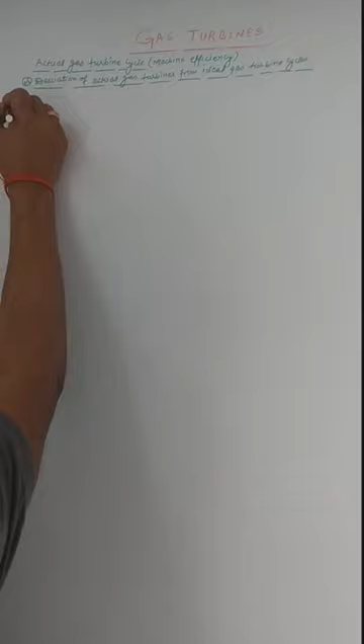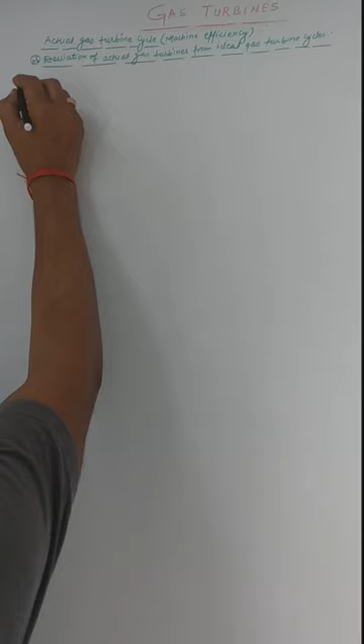Since we know that the factors which are responsible for the deviation of actual cycles from the ideal cycles are, since we know that the theoretical or ideal Brayton cycle is completely reversible in nature.

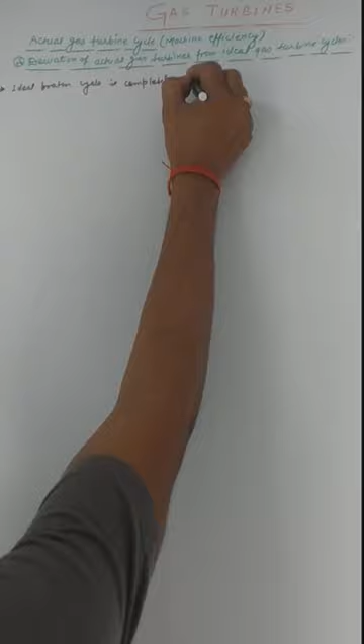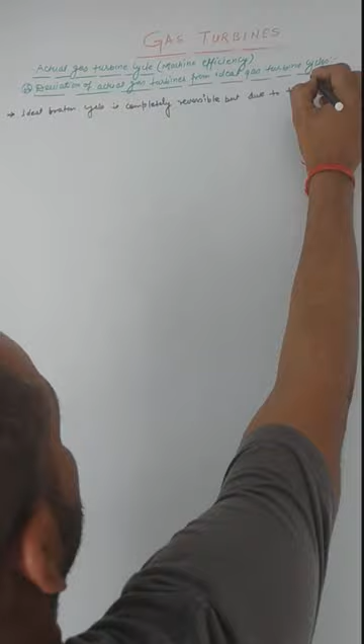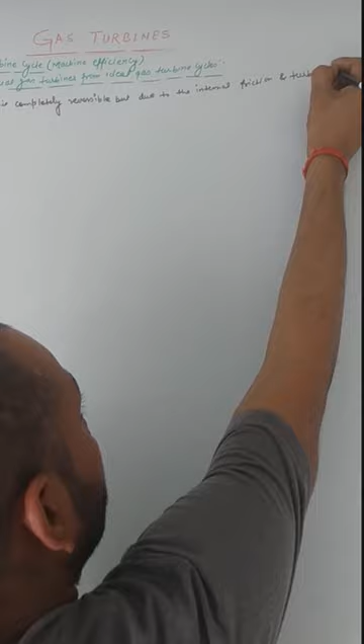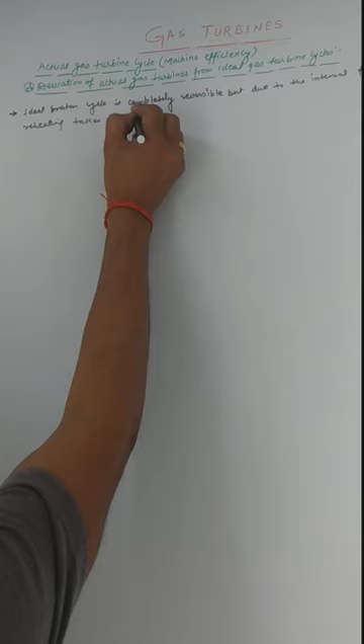But due to the internal friction and turbulence, there is a reheating that takes place in the compressor and turbine.

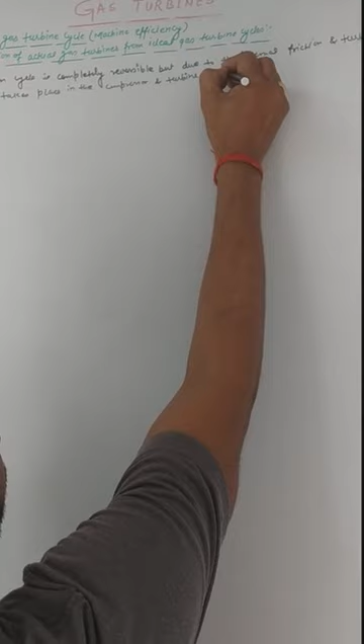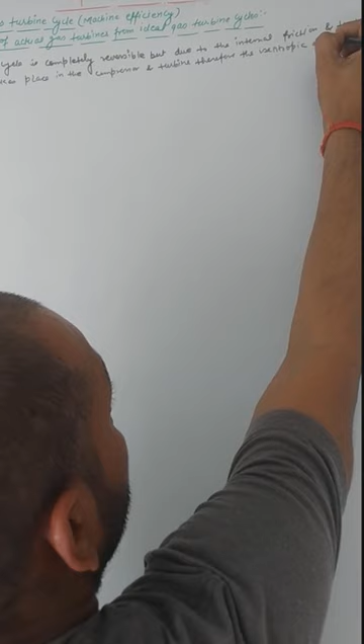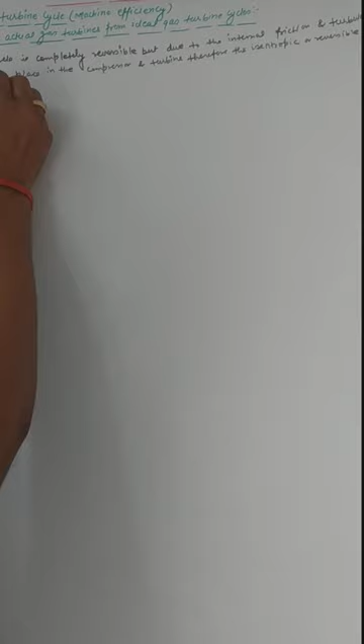Therefore, the isentropic or reversible adiabatic process will no longer be isentropic.

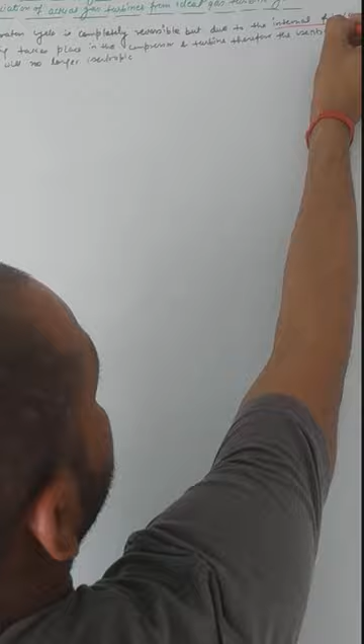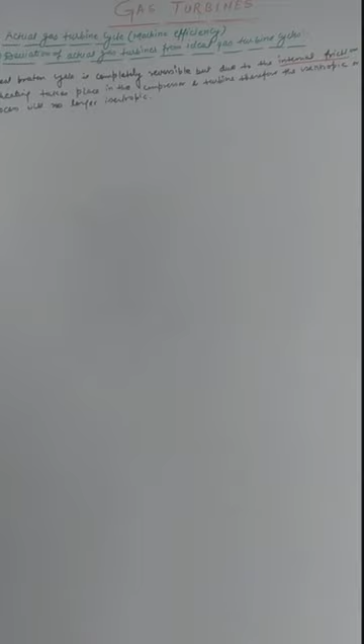This happens because of the irreversibility caused in the system due to the internal friction and the turbulence. Turbulence is something where there is a random mixing of the working fluid while it is compressed and expanded in the compressor and turbines.

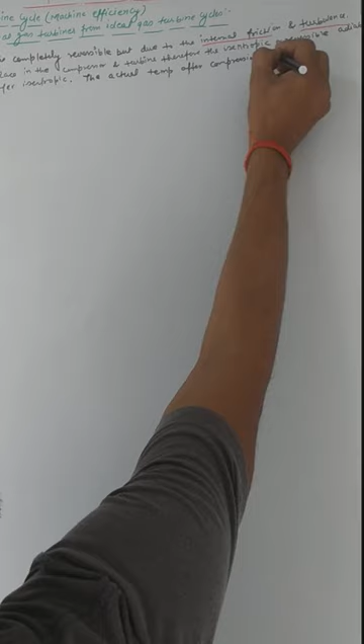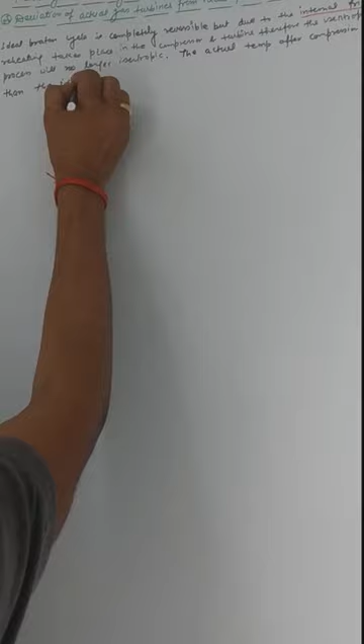So the effect of this is the actual temperature after compression and expansion are higher than the ideal cycle. This is the major factor that is responsible for the drastic change in the actual gas turbine cycles, or you can say the actual Brayton cycle.

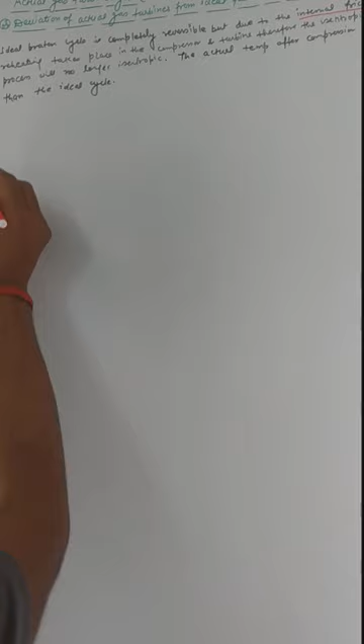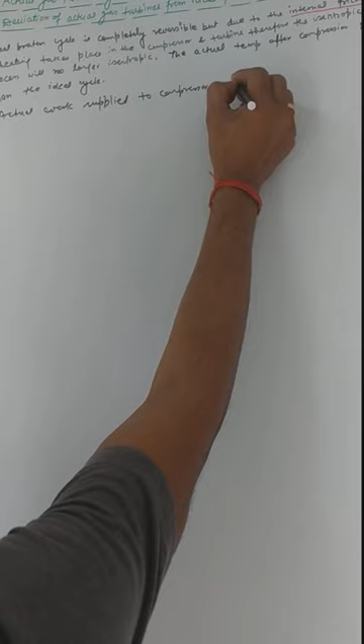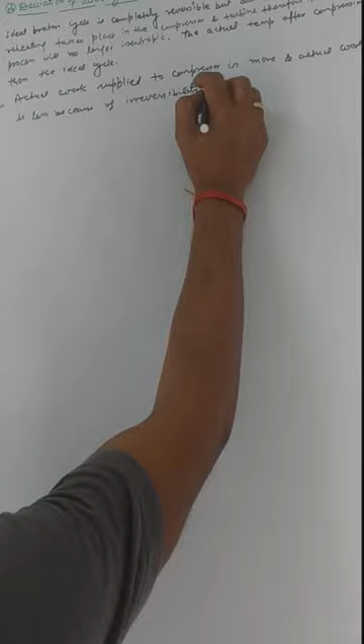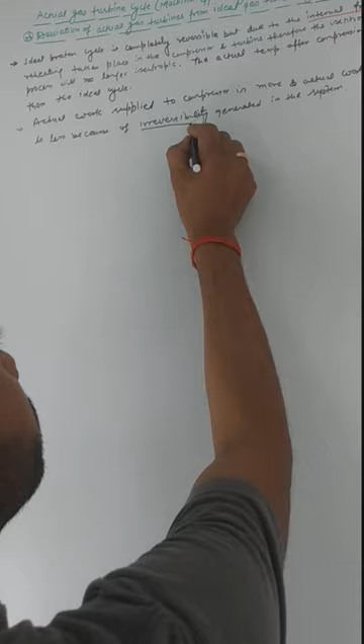The other thing is that there is also a change in the work supplied and the work produced in the cycle. Due to these irreversibilities caused by the frictional force and turbulence, the actual work supplied to the compressor is more, and the actual work output to the turbine is less, because of the irreversibility generated in the system. We have discussed this irreversibility is generated due to the internal friction and the turbulence.

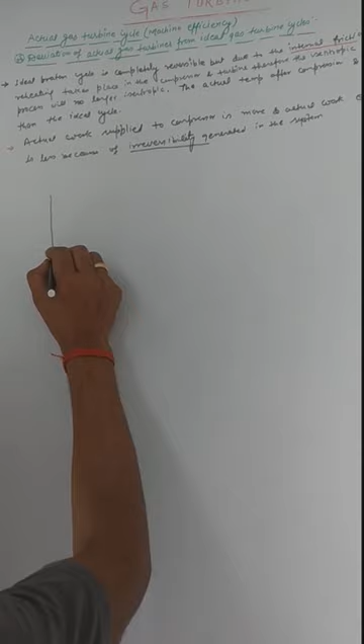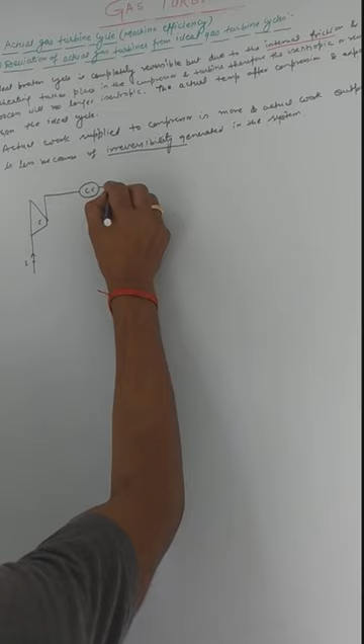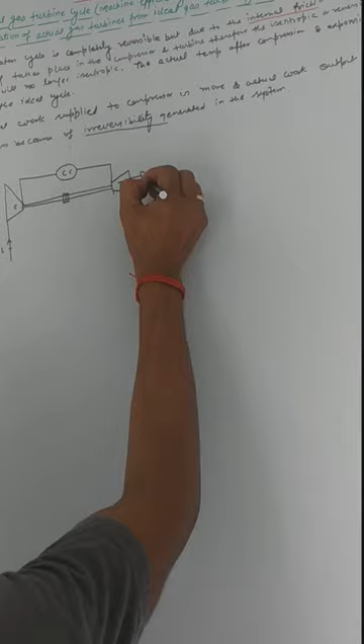So I can draw the layout of the gas power plant. This is the compressor, inlet at point 1. After compression, there is a combustion chamber. This is the shaft, coupling shaft, on which both compressor and turbines are mounted. This is exit, this is output shaft. So this is compressor, this is combustion chamber, this is turbine.

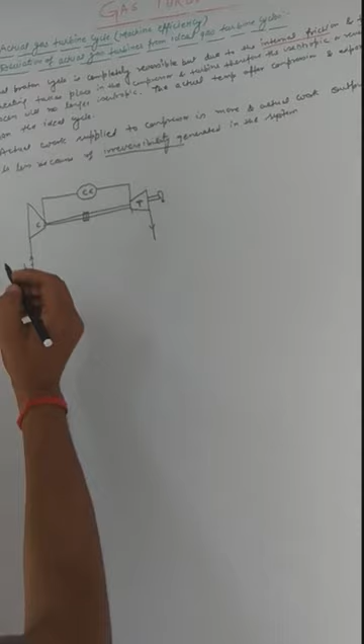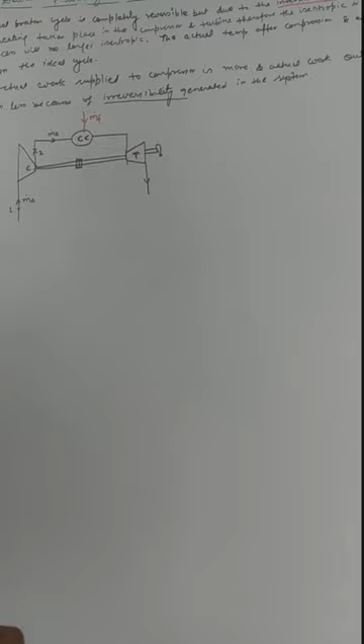Here, air first enters at point 1, atmospheric air enters with mass flow rate ma, and after compression it enters the combustion chamber, where there is a supply of fuel. Let mf be the mass flow rate of the fuel. So after combustion, the flue gas is generated at point 3 as the mixture of ma dot plus mf dot. This is the mass of the gases generated after combustion.

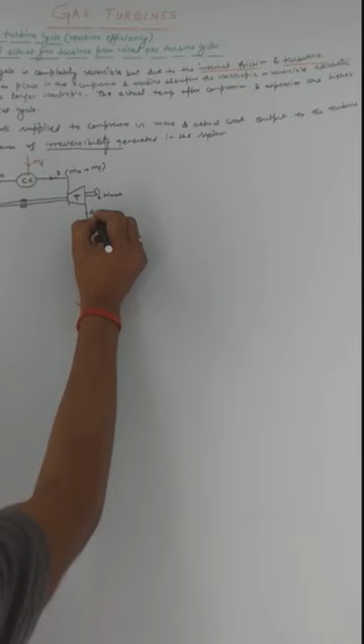So these gases are expanded in the turbine and will produce the shaft work W mechanical at the output. And after expansion, exhaust takes place directly into the atmosphere, because this is the open gas turbine cycle.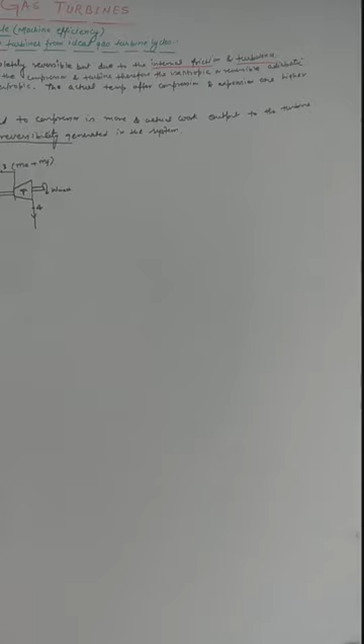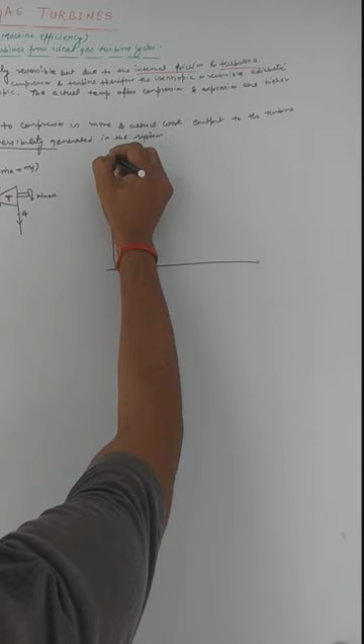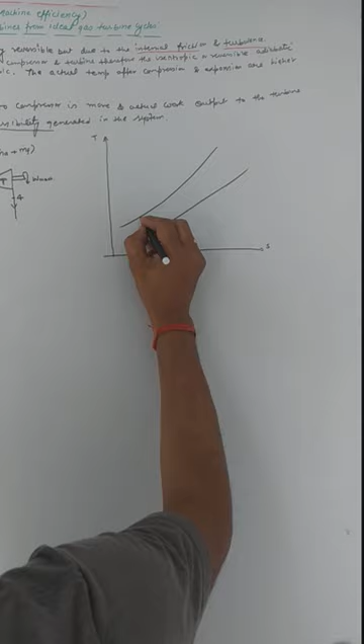So this is the layout of the plant, and we can draw the TS diagram also for the actual cycles. These are the diverging lines. This is the actual, this is the ideal compression, 1 to 2.

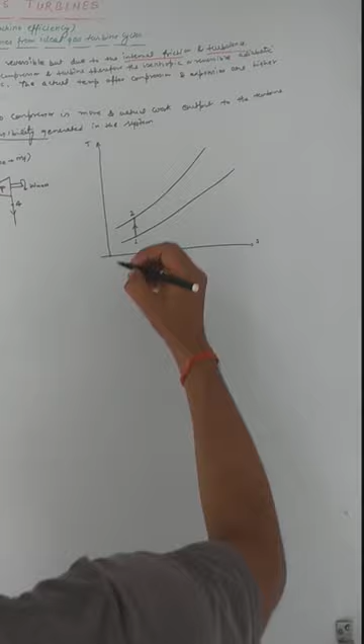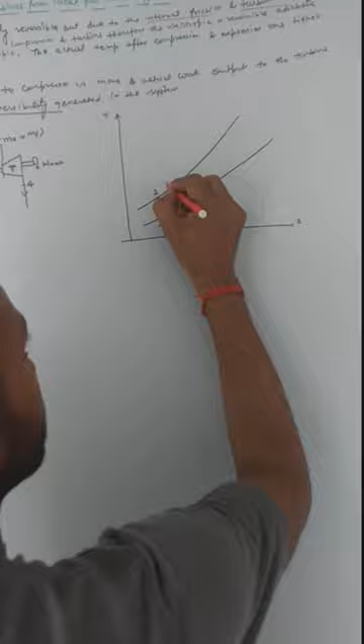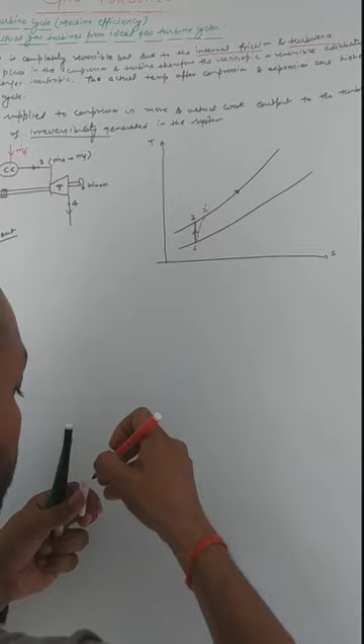But due to the irreversibility and frictional force, there is a deviation of the process, 1 to 2 dash. This is the actual compression that takes place in the compressor. Now 2 dash to 3 is a combustion process.

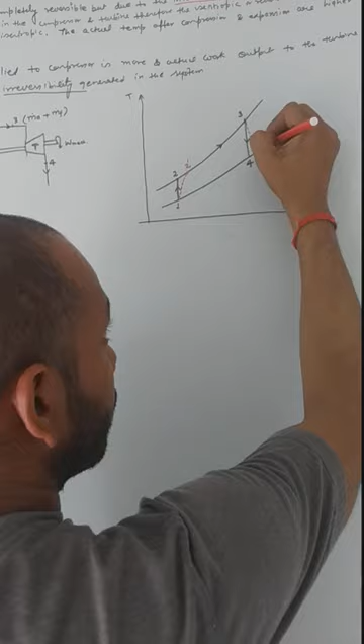3 to 4 is isentropic expansion, but this isentropic expansion deviates due to the irreversibility in the system. 3 to 4 dash is the actual expansion occurring in the turbine, and 4 dash to 1 is heat rejection.

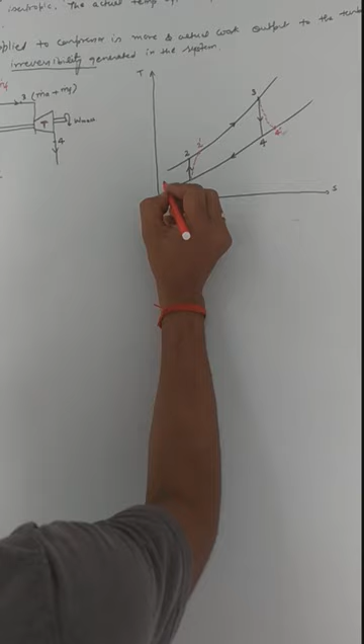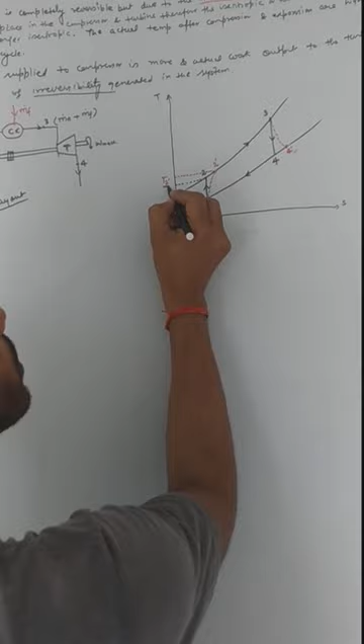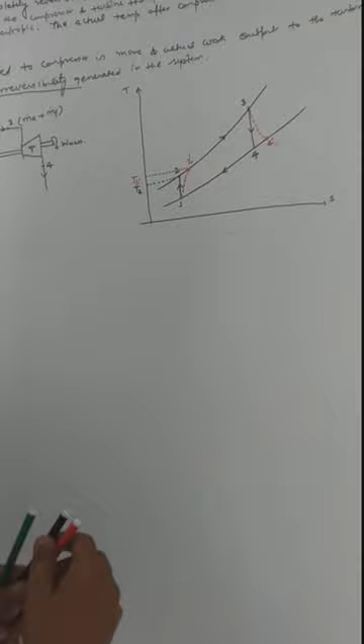So we can see very clearly in the diagram that the actual temperature after compression is higher. T2 dash is higher than the ideal cycle temperature, that is T2. This is because of irreversibility caused due to the frictional force and turbulence in the system. This can also be seen at the turbine, that is T4 dash is higher than T4. This is again because of the irreversibility in the system.

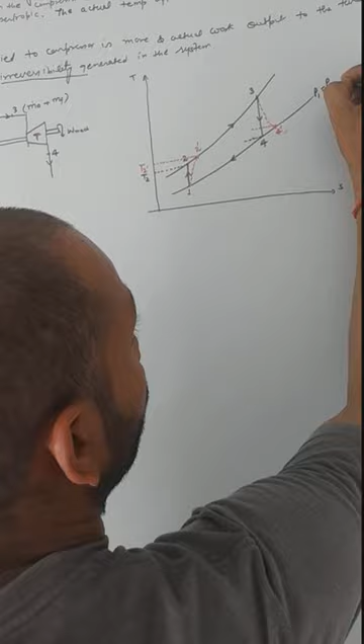Here pressure P1 equals P4 equals P4 dash, and P2 equals P2 dash equals P3. Constant pressure lines are diverging lines on the TS diagram.

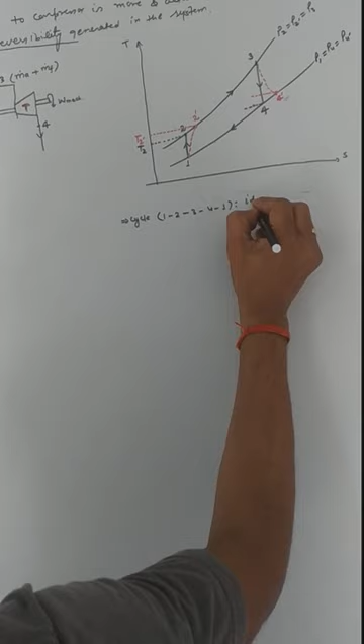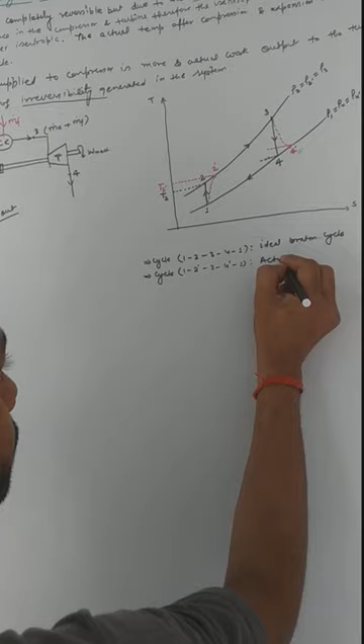So now we can write the cycle 1, 2, 3, 4, 1. This cycle is called the ideal Brayton cycle, and the thermodynamic cycle 1, 2 dash, 3, 4 dash, 1 is the actual Brayton cycle.

Okay, so, okay, here.

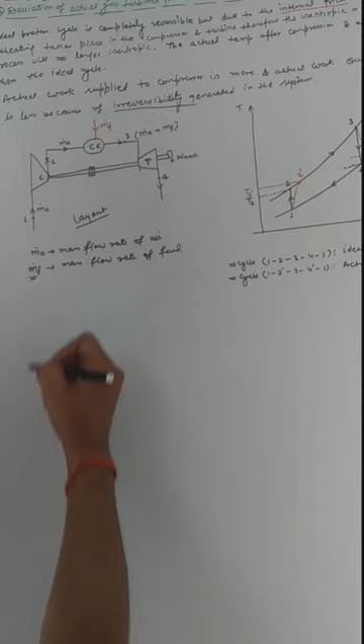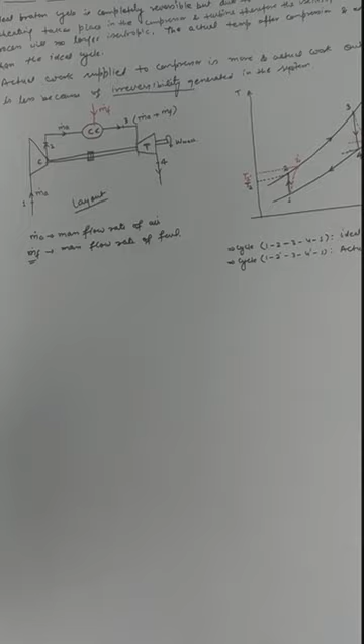Ma dot is the mass flow rate of air, and Mf dot is the mass flow rate of fuel. Here the mass flow rate of fuel is also introduced, and we also introduce the Cp of fuel, because the specific heats are not constant in this actual process. In the ideal Brayton cycle, Cp does not change with temperature, but in the actual case Cp changes with temperature as fuel enters. That's why the combustion products have a different Cp, which we call Cp of gases.

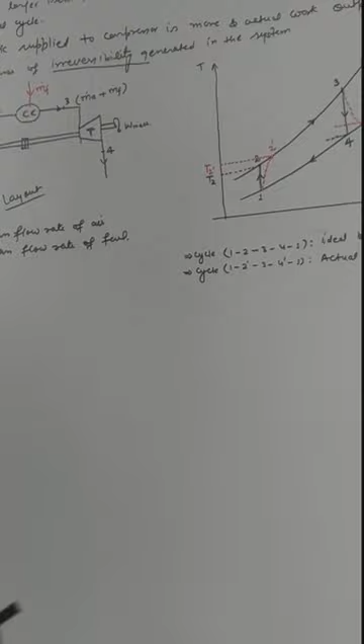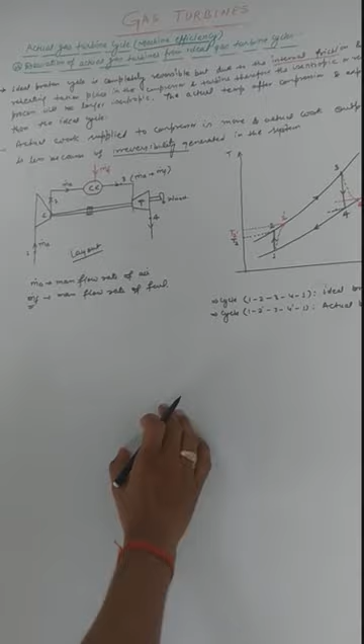We can write the efficiency of these machines, which are the turbine and compressor. That's why the name machine efficiency is introduced. These efficiencies account for the difference between the isentropic and actual expansion and compression processes in this actual cycle.

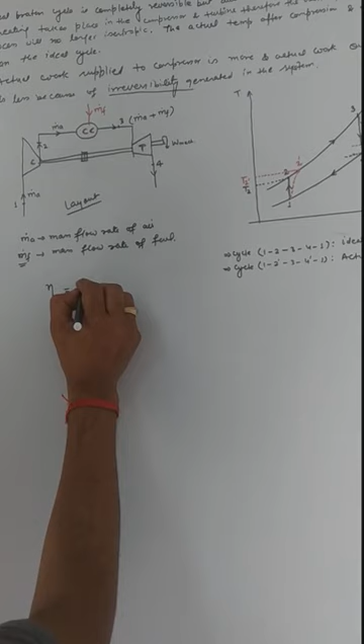So we can write the compressor efficiency, denoted C for compressor. The efficiency of the compressor is the isentropic work done divided by the actual work done. This is the efficiency of the compressor, and it can be written in terms of temperatures.

The isentropic process is 1 to 2, so T2 minus T1 is the isentropic compression, divided by the work supplied in the actual compression, that is T2 dash minus T1. This is the compressor efficiency.

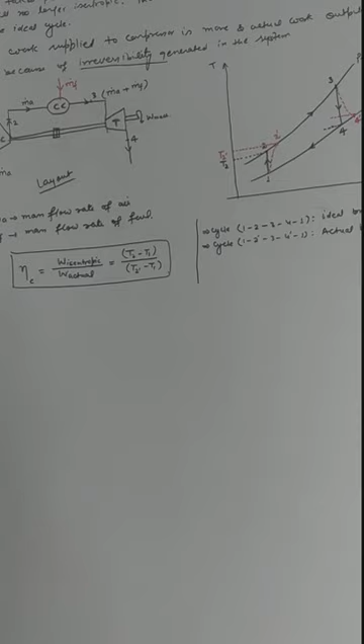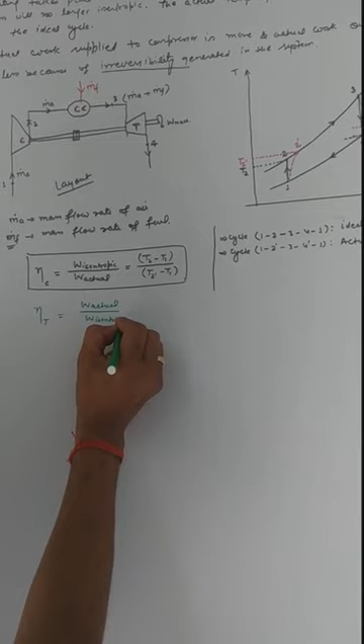Now the turbine efficiency we can write as W actual divided by W isentropic. The actual expansion is 3 to 4 dash, so we can write T3 minus T4 dash divided by the isentropic expansion 3 to 4, that is T3 minus T4.

These efficiencies are introduced to find the unknown temperatures, or you can say the actual temperatures of the cycle.

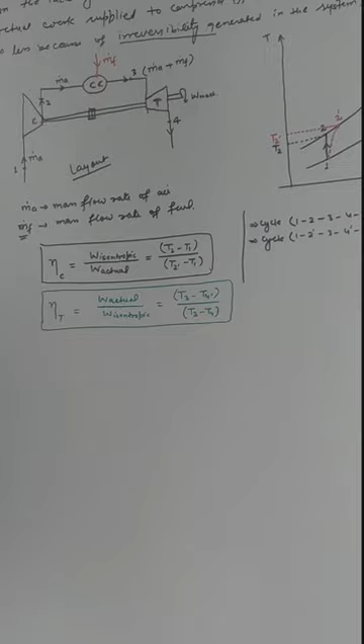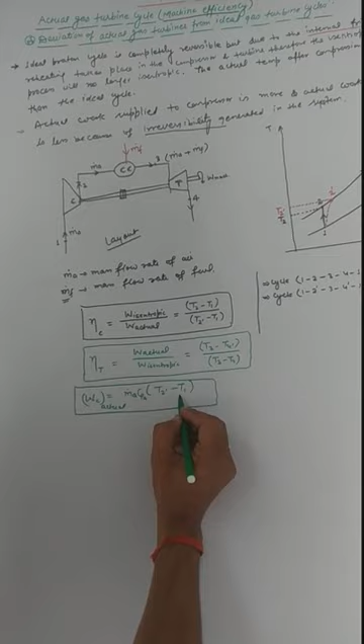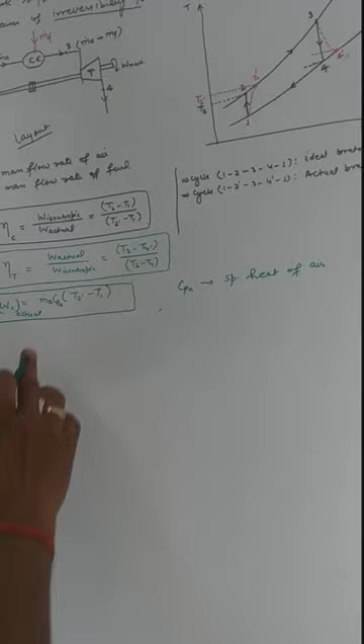We can also write the compressor work WC, or the actual compressor work. WC, the actual compressor work, is equal to Ma dot times Cp of air multiplied by T2 dash minus T1, which is the actual work supplied to the compression. 1 to 2 dash is the actual compression. Cp of A is the specific heat of air, and Ma dot is the mass flow rate of the air.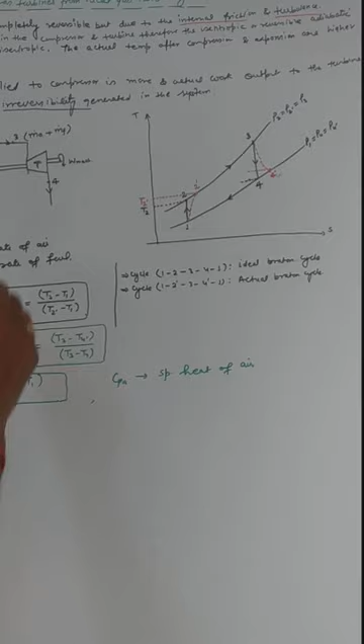In a similar pattern we can also write the turbine work. The actual turbine work, where the turbine operates between 3 to 4, that's the actual expansion. At point 3 the mass flow rate is Ma dot plus Mf dot, and Cp of gases multiplied by T3 minus T4 dash gives this actual expansion work done.

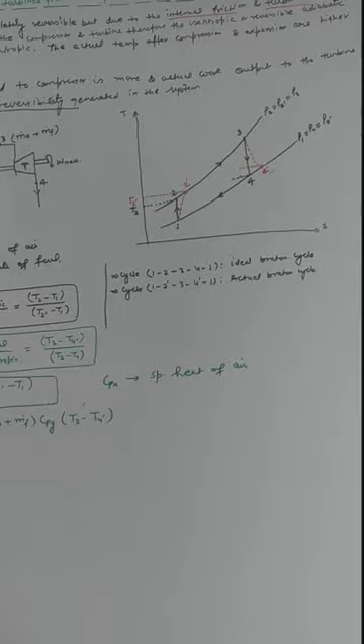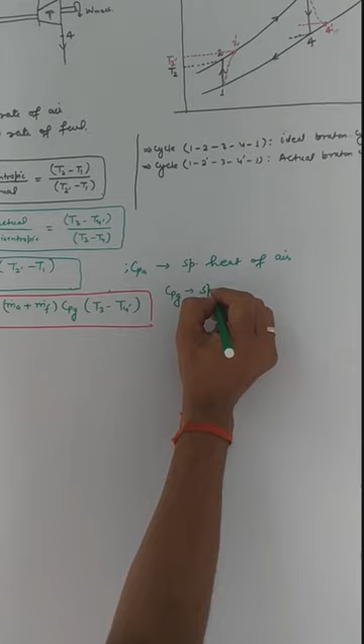Cp of G is the specific heat of gas, or the product of combustion. It comprises the air plus fuel mixture.

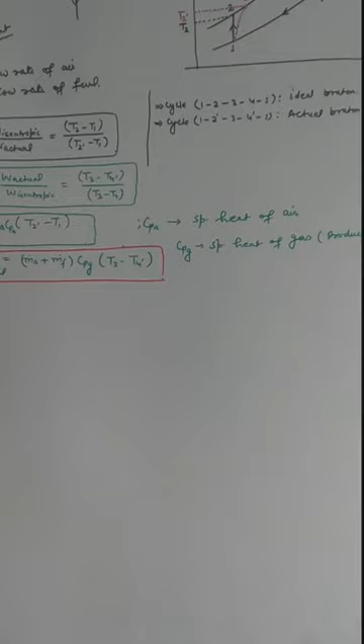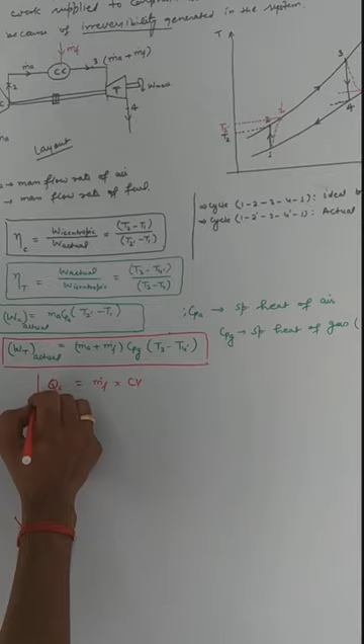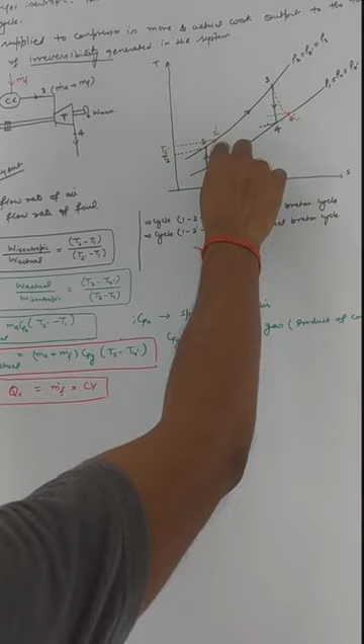We can also write the heat supplied at the combustion chamber, Qs, as the mass flow rate Mf dot multiplied by the calorific value of the fuel. So this is the heat supplied in terms of calorific value of the fuel. We can also write the heat supplied in terms of temperatures, that is T3 minus T2 dash.

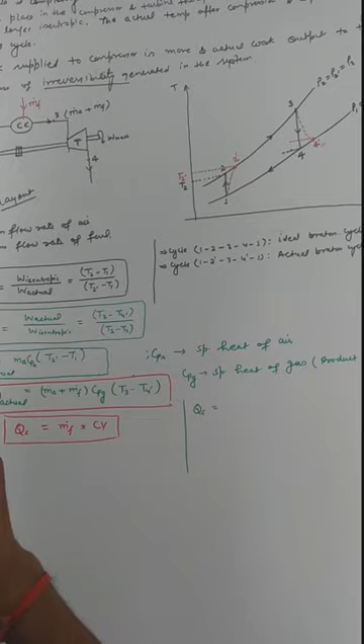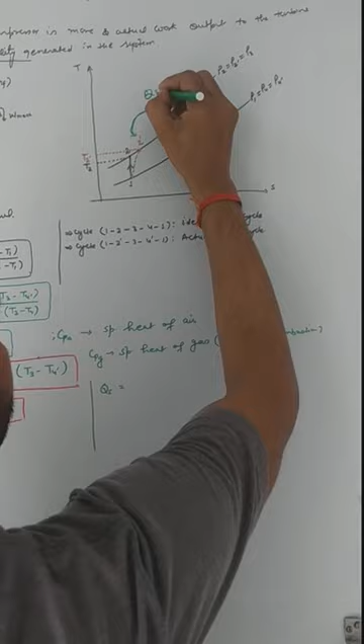If you are interested to write heat supplied now in the 2 dash to 3 process, this is the heat supplied Qs, and the heat rejection is QR. Between T4 dash and 1 is the heat rejection.

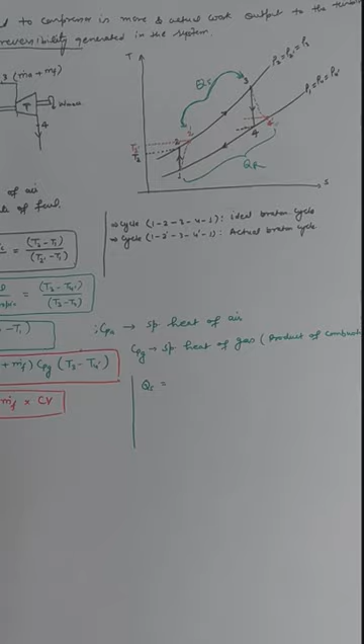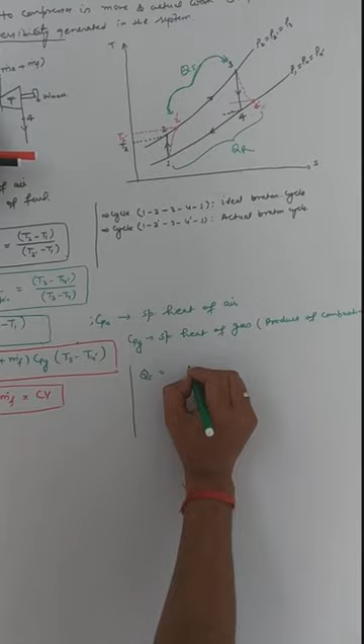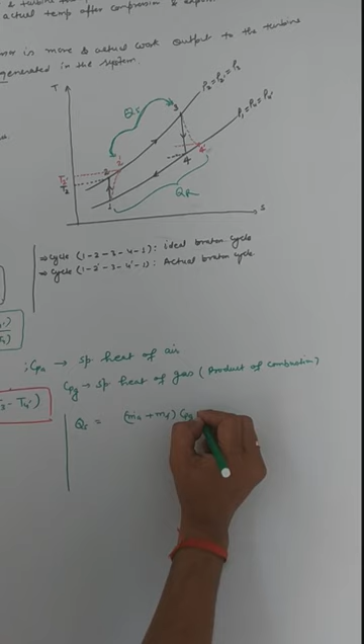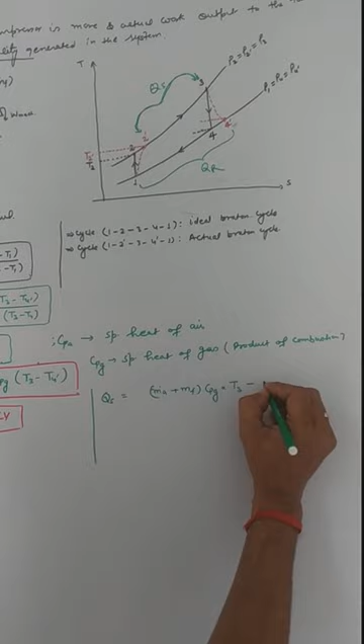If you want to write the heat supplied in terms of temperature, we know that at point 3 the mass flow rate is Ma plus Mf, multiplied by Cp of gas, multiplied by T3 minus T2 dash, where 2 dash is the point before combustion. So I can write Ma dot multiplied by Cp of air multiplied by T2 dash. This is the actual heat supplied to the combustion chamber.